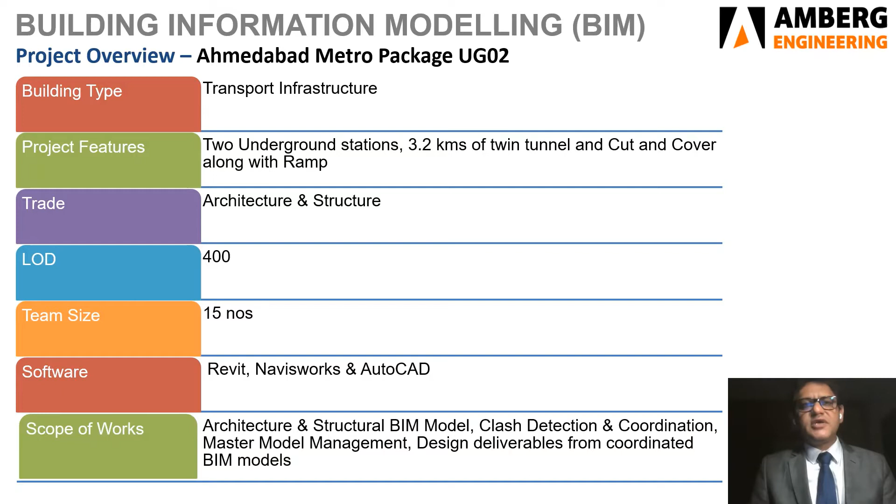Coming to the alignment, the stretch starts from Kallupur launching shaft. Exiting from the shaft, the bore tunnel passes underneath a railway line, traversing for 2 kilometers and opening into the 170-meter long Gheekanta station. The second stretch of the bore tunnel starts from the Gheekanta station, travels 1.2 kilometers and finally terminates into the 270-meter long Shahpur station box.

The last stretch of the alignment starts from the end of Shahpur station and comprises a 180-meter cut and cover section, followed by a 76-meter underground ramp and 25-meter elevated ramp, which finally merges with the elevated section of the line, which is the contract boundary.

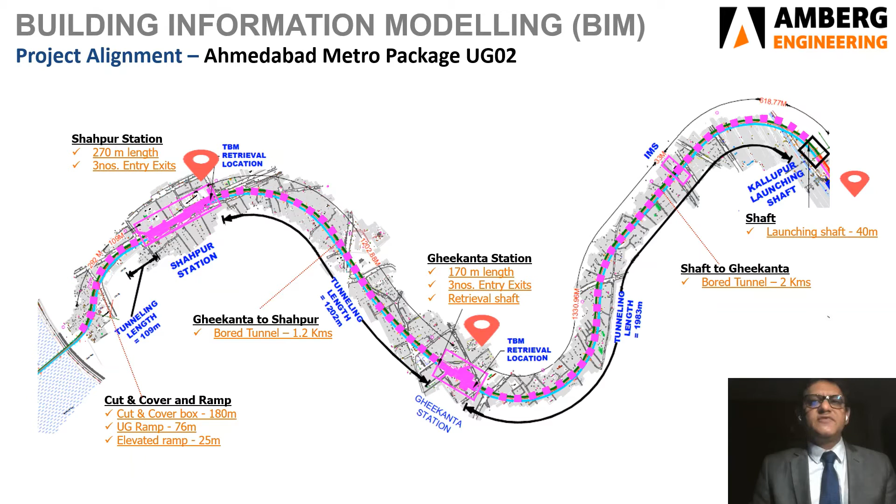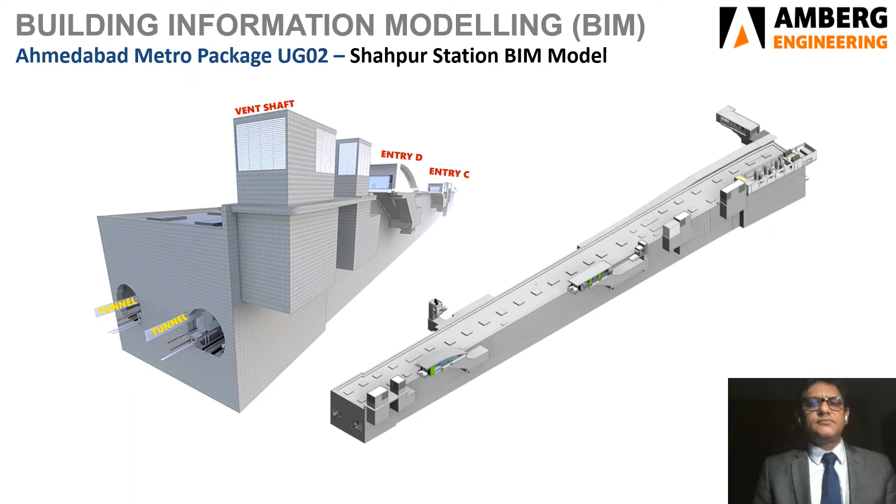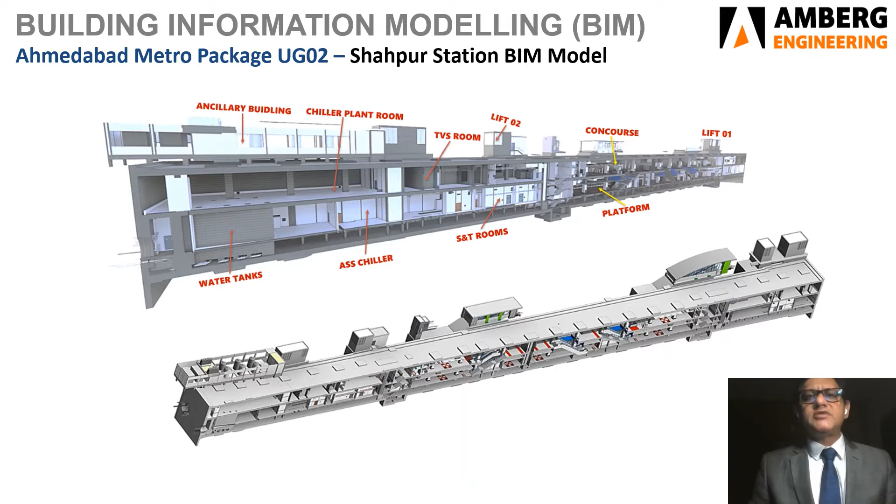Here you can see the BIM model of Shahpur station. This cross-sectional view of the model clearly brings out the various service and utility areas of the station building.

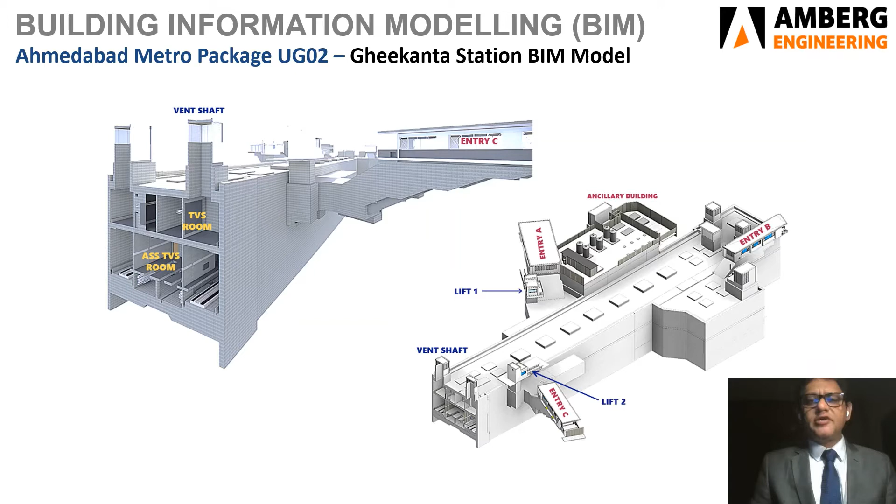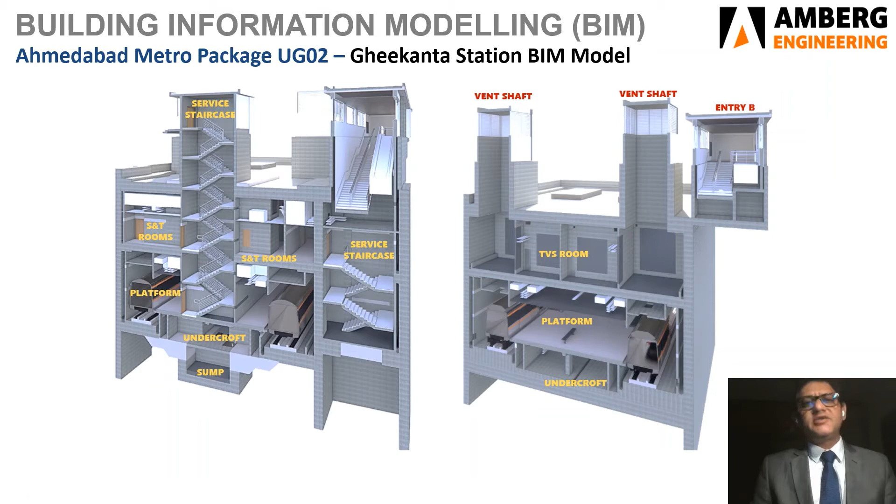This is the BIM model of Gheekanta station. Gheekanta station is a shorter station with a length of 170 meters. The ancillary buildings have been accommodated on both sides of the station. Here you can see the cross-sectional view from the model of Gheekanta. All the levels are very clearly visualized. It is to be noted that all the GADs and detailed GFCs of these projects were issued from the Revit models.

The second project that I will dwell upon is Delhi Metro Package DC06. This package comprises one station. DC06 is a part of Magenta Line, consisting of 25 metro stations over a total length of over 38 kilometers. The scope of the project involves structural design of tunnels, cross passages, one station, cut and cover section, and a ramp. The level of detail required is LOD 400, and we have a team of 10 modelers working on this

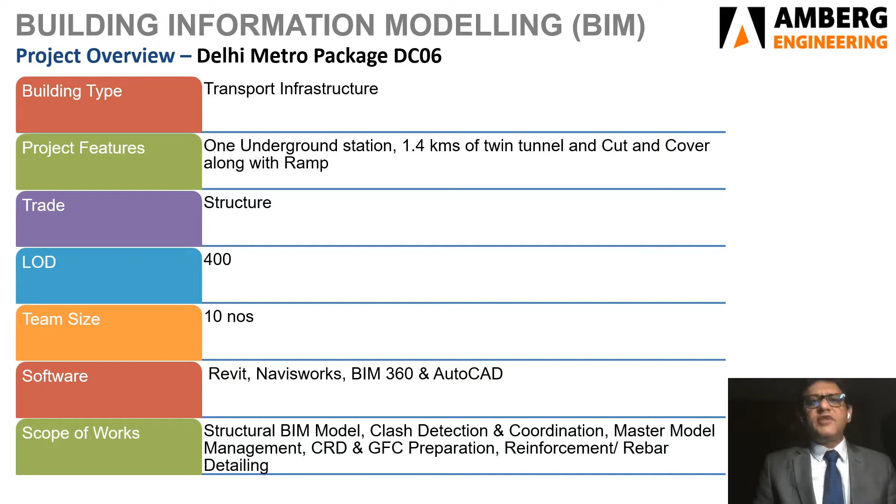project. Apart from all the things that we did in Ahmedabad Metro, in this project we had to perform reinforcement detailing in Revit. This is the next level of BIM implementation in underground transportation infra design, and we are happy to state that we did that.

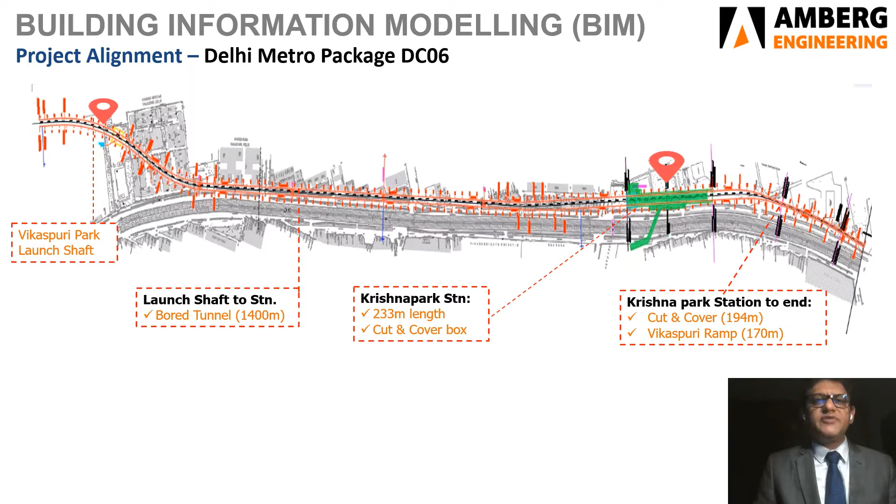The project stretch highlighted in this slide comprises almost 2 kilometers of underground extension from Vikaspuri Park shaft to Vikaspuri ramp. The stretch starts from the existing launch shaft located in Vikaspuri Park. From the launching shaft, the bored tunnel traverses 1.4 kilometers, opening into a 233-meter long Krishna Park station. The second section of the stretch comprises a cut-and-cover section of 194 meters and a ramp section of 170 meters leading to the terminal limit of the package.

As a part of the project, structural BIM models have been created in Revit, and all the good for construction drawings are being extracted directly from the model. This also enables us to have BOQ and quantities from the model. All the submissions and reviews are being done through the collaboration platform BIM 360.

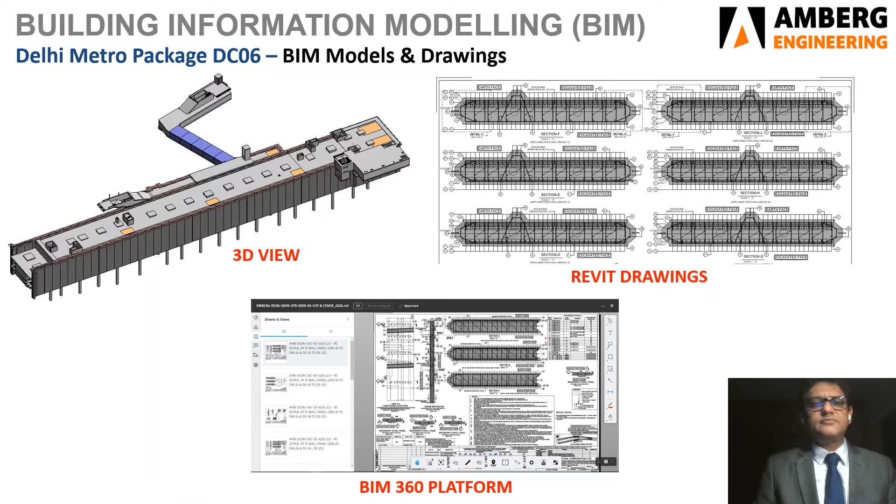As mentioned before, all the reinforcement detailing at the good for construction stage in this project has to be done in Revit. Seen here is the reinforcement detailing for tunnel segment ring and the station D walls. Before we end this part of the presentation, I would like you to see a walkthrough into Krishna Park station through our structural BIM model.

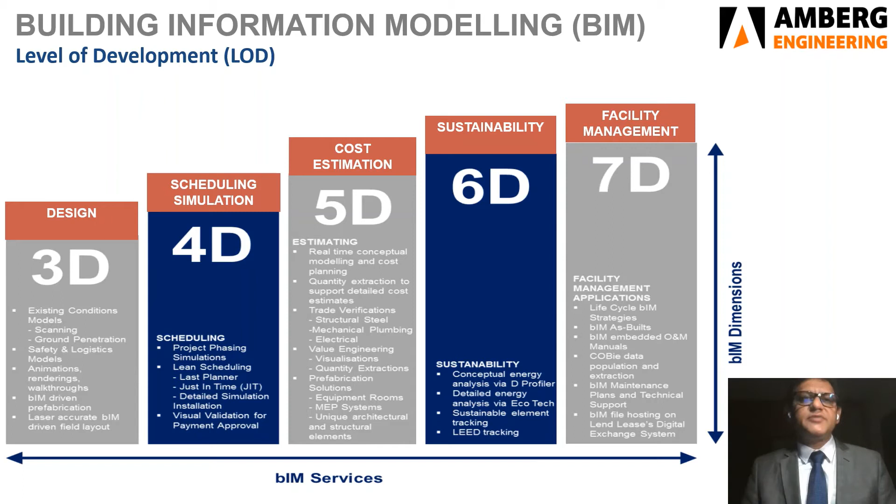So what are we talking about? We are talking about LOD implementation levels. BIM level of development is an industry standard that defines how the 3D geometry of the building model can achieve different levels of refinement. These development models are purpose-built for various stages of the project like design, 3D visualization, BOQs, project planning and scheduling, cost estimations, on-site production control and fabrication, and eventually facility management. We will now look at each of them individually.

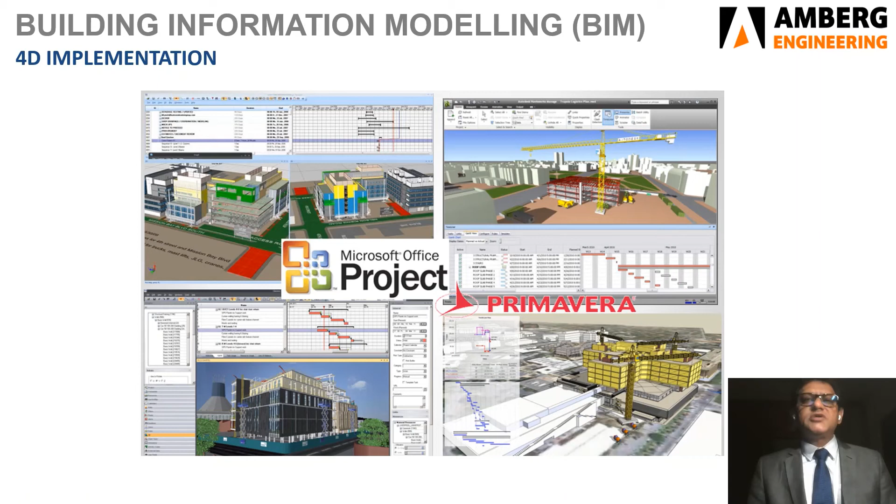First, we will talk about 4D implementation. 4D simulation is a process that combines 3D models with the project schedule, allowing all stakeholders to visualize the construction phase in a virtual environment. The key advantages of 4D implementation are improved design document quality by testing the design against construction sequencing and thereby eliminating or reducing difficult sequence issues; improved site use planning and coordination with ongoing operations; improved lead time identification, which can reduce total construction duration; and planned versus actual visualization.

Coming to 5D implementation, a 5D BIM model includes construction cost estimation based on material quantities produced from model-based data. 5D BIM modeling allows architects, estimators, engineers, manufacturers, material suppliers, and subcontractors to share a single view of the entire project in real time. The key advantages of 5D implementation are accurate cost estimation and forecasting, detailed quantity takeoffs, real-time changes to quantity takeoffs as per design modifications, faster decision-making process, improved collaboration among stakeholders, and assistance in swift material procurement.

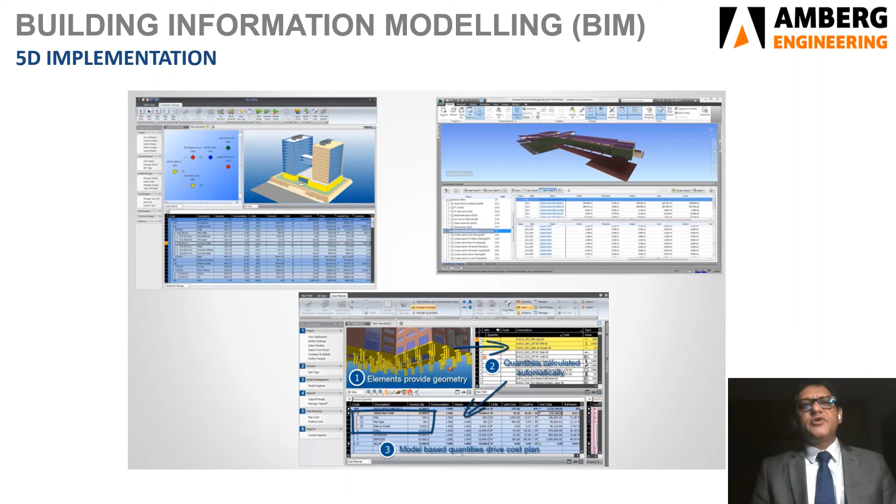The final level of 7D implementation is all about operations and facility management by building managers and owners. This dimension is used to track important asset data such as its status, maintenance and operation manuals, warranty information, and technical specifications to be used at a future stage. The key advantages of 7D implementation are optimized asset and facility management from design stage to demolition, simplified and easy replacement of parts and repairs anytime during the entire life of the building, and streamlined maintenance and process for contractors and subcontractors.

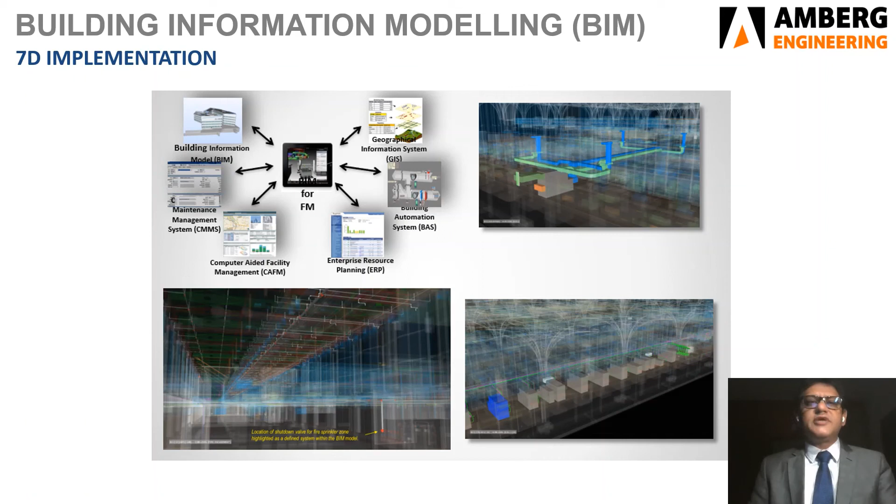At Amberg, we realize the importance of being ahead of the curve. As a team, we are fully integrated and capable of delivering to the project and client needs through digital technologies and platforms. We love challenges and look forward to serving our clients with the motto, do it right the first time, every time. Thank you.

Hello everyone, I am Ramesh Sharma, Managing Director of Infocon Services. Our collaboration with Amberg India started 5 years back while entering into partnership for a mega project. Though it was not a contractual requirement, our team was keen to implement BIM from the initial design stage, and the idea was fully supported by Amberg management. Perhaps they already had in place a vision to adopt technologies and integrate it with the design deliverables.